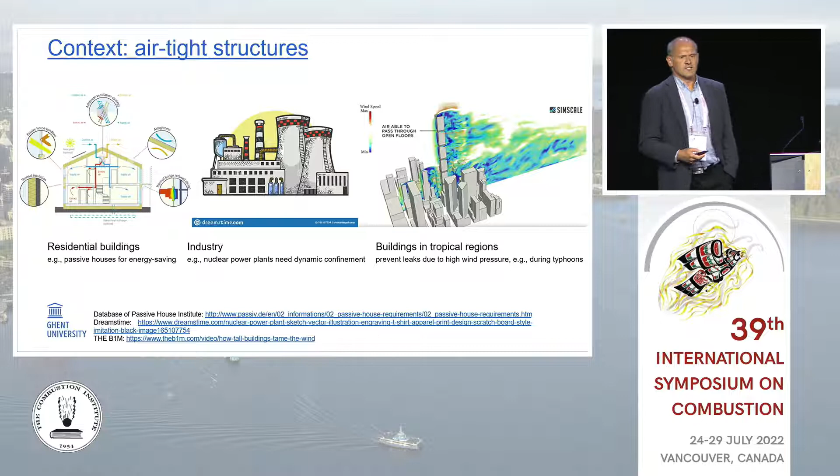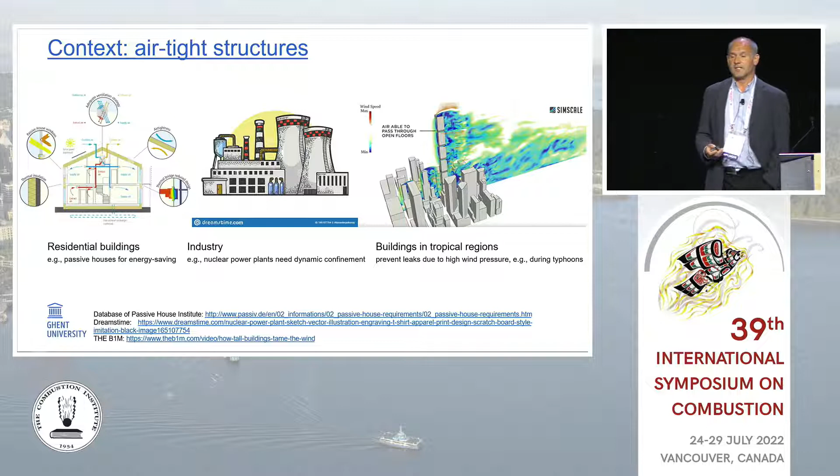The context for our interest in these airtight enclosures is the modern trend in buildings toward reduction of energy consumption. Houses are better insulated and made more airtight. There are also applications in industry, for example the nuclear industry, where you have to avoid spreading of radioactive material in case of an incident. Also, windy regions with high-rise buildings tend to be airtight.

This can be problematic in a fire, because hot combustion products are released, and these have the tendency to occupy more volume than gases at ambient temperature. In combination with a low leakage area, this leads to substantial rises in pressure, which in turn can hinder evacuation of people from a building, because it becomes very difficult to open doors.

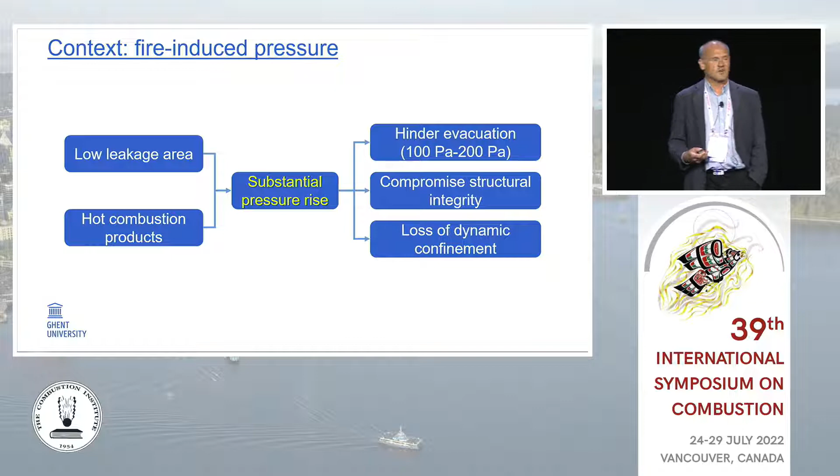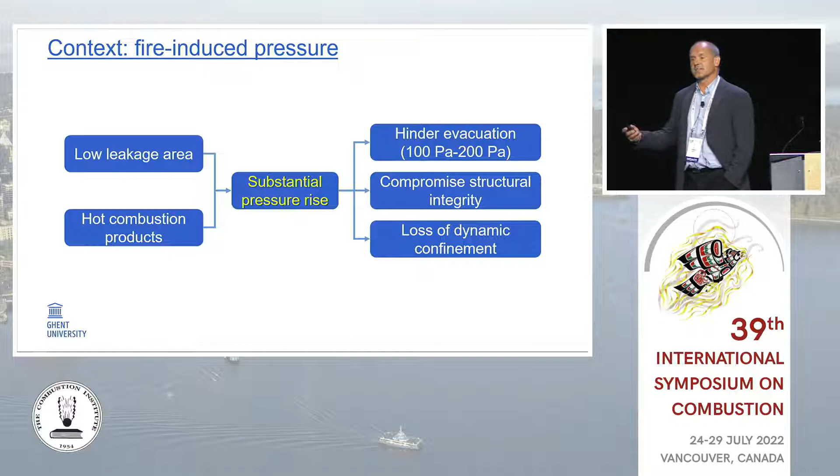If you have a pressure higher than 200 Pascal, even the best trained person in this audience would not be able to open a door. But it can also compromise structural integrity and lead to a loss of confinement, in a dynamic way due to the fire dynamics, and thus this safety issue can be a real problem.

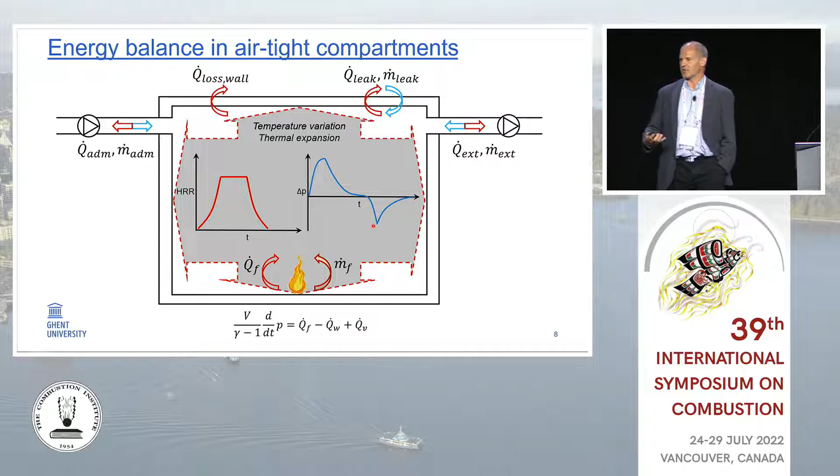So in principle, this is a bit strange at first sight, but it's not, and we tried to explain that because these flow rates that you see here, admitting and extracting gases, they would also depend on the pressure inside the enclosure through the characteristics of the fans.

So one way to look at this issue is to say, well, this is an overall equation for pressure as function of time, so we don't really need much detailed information on the flow field to get this pressure evolution. All we need is an estimate of the heat release rate, the heat losses, and that's it.

So you can indeed go for analytical solutions and zone model type approaches, where you would have a single zone or maybe two zones inside the compartment, but not more than that.

I should say that the heat losses are not so easy to quantify, and they are important to quantify, but that's not the focus of the present talk. And there will be this complex dynamic interaction with the mechanical ventilation system.

Now, if you want to be really predictive, including a prediction of the heat release rate, then it will be important to have more detail on the flow field, because you need to know what's happening in the region where the fuel is released.

Again, small disclaimer here, these slides are changing automatically apparently. It's very important, if you have a liquid fuel or a solid fuel, to model the evaporation of the liquid fuel or the pyrolysis of the solid fuel. These are very interesting and important topics on themselves, but I'm not going to address those.

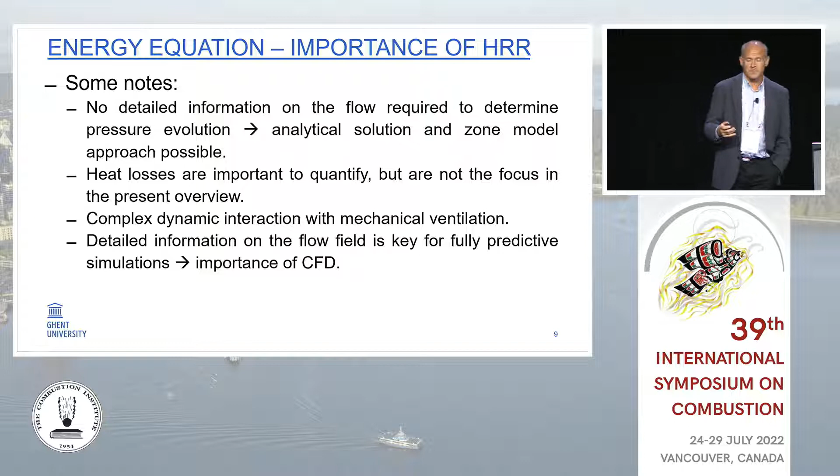So I'm only going to focus on gas phase phenomena, and I'm going to use results that we obtained with gaseous fuel. And even that is complex enough, as I will try to explain.

So when I say 'we', I actually do not mean only at Ghent University. We had a very good collaboration with IRSN in France, where former PhD student Junyi Li spent a few months to do some experiments in what is called the NYX setup.

The details you can find in the paper, but it's a rectangular box. You see the size here on the slide. And what is specific in this study is that he used gaseous propane fuel that you see there in the red square on the sketch.

And this was fully instrumented, with thermocouple trees, pressure measurements, even some measurements of species. So we had pretty good control over what was happening, because we could monitor and actually control the gaseous fuel flow rate into the compartment.

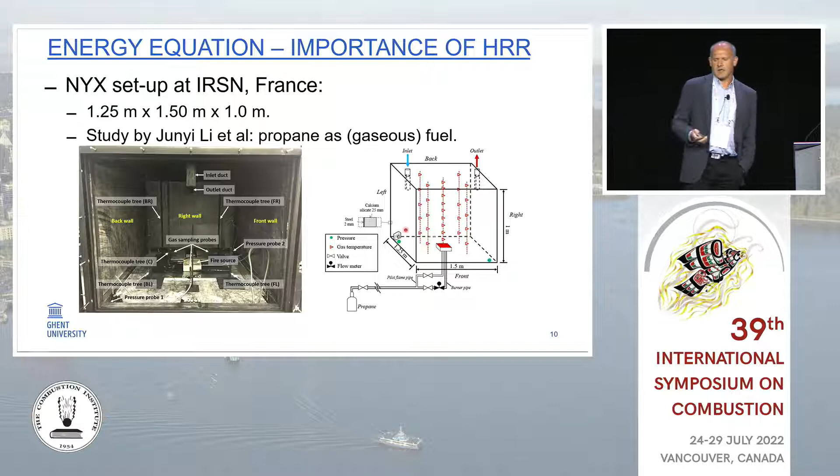The blue line is the supply duct for air, and the red arrow that you see there was the extraction of the hot gases. These give you some impression of some pictures during the tests.

These were provided by Dr. Hugues Prétrel from IRSN. So the top left is the ignition of the pilot flame, and then the second one is the real ignition of the gas fuel, and then you have some steady burning phase where we have a constant heat release rate as function of time, but obviously things are turbulent, so the flames are fluctuating, and at some point we chose to extinguish the flame in a controlled way.

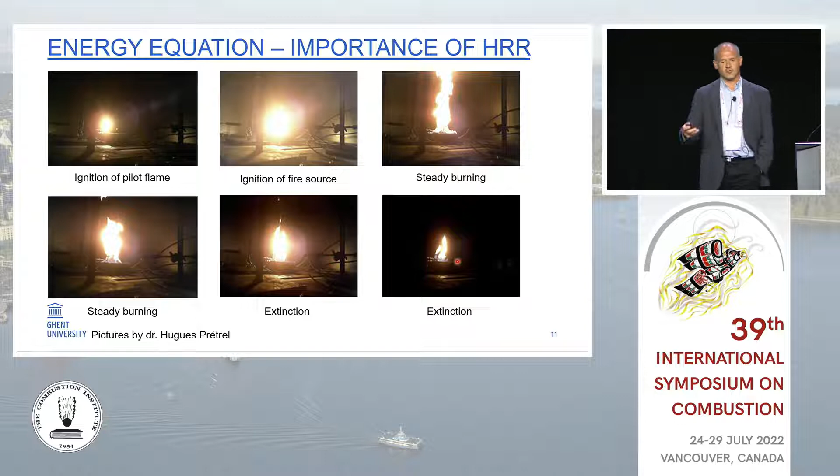And the idea was to vary certain parameters and to try to understand what is the resulting pressure evolution. So what you see here as one of these results is we start off with a zero fuel mass flow rate, and we switch on the ventilation system. So you start with some under pressure, which is typical in the context of nuclear industry, for example, so that you do not have gases escaping from the enclosure.

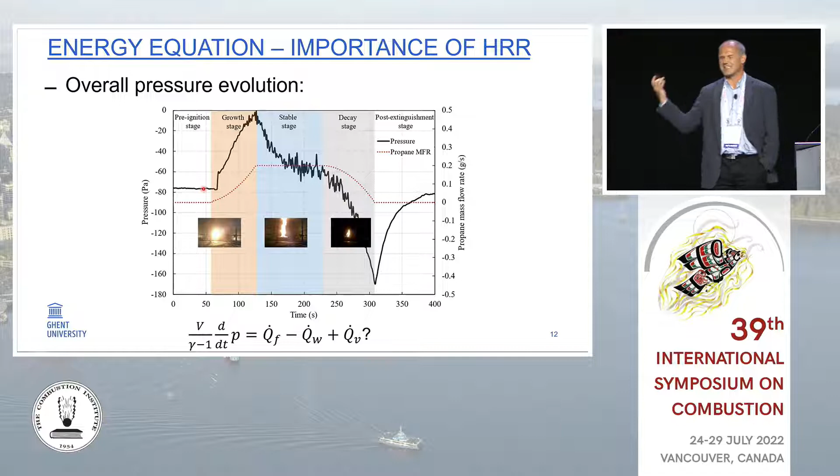Once we ignite the gases and start to feed the compartment with fuel, which is the red dotted line, you see a sudden increase in pressure as a function of time. As long as we keep increasing the heat release rate, the pressure keeps increasing over time. Then we keep the heat release rate at steady state, and you see this relaxation of pressure back to somewhere close to the initial value, until we choose to reduce the heat release rate as a function of time, and then we have a significant underpressure inside the enclosure.

If you allow the system to cool down and keep the ventilation system switched on, your pressure goes back to the initial value. But as I said, this cannot readily be explained from this equation, because you would expect a pressure rise as a function of time as long as the heat release rate is dominant.

Now, the interaction is much more complex, and I will not spend too much time on this, but you can look at it in terms of an electrical analogy, where the enclosure works as a capacitance in the circuit, and then you have different sources. One would be the fire, the other two would be the ventilation fans, and you would have flow resistances through the duct systems, leading to a complex interaction.

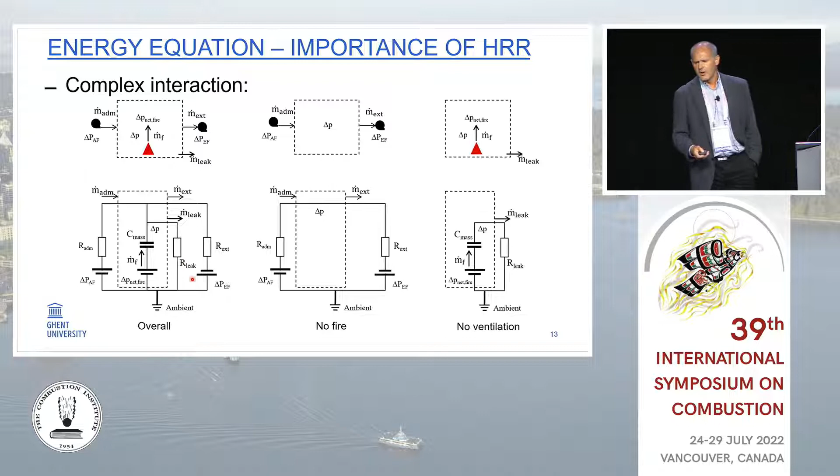You can study the whole thing, or you can study the ventilation only, or the fire only. In the end, if you do that and perform some time scale analysis, you do indeed find this theoretical result: in certain circumstances, it's the pressure rise rather than the pressure derivative as a function of time that evolves directly with the difference between the heat release rate and the losses through the walls.

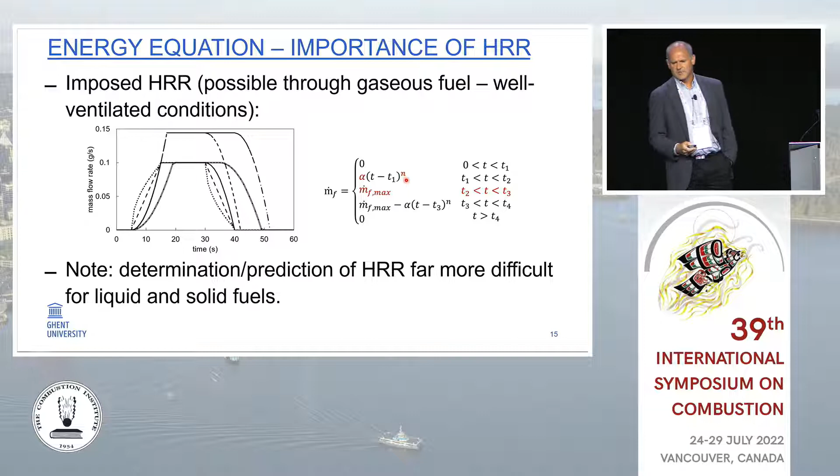This gives you an overview of what we varied. We varied the speed with which we increased the heat release rate, the duration, the maximum heat release rate - many parameters. So it was quite an extensive experimental campaign, which we could then use to check and validate our numerical results.

Now, before getting into the CFD part, a few words on scaling. In fires, the scaling laws are actually well known. What is done is so-called Froude scaling, where you keep the Froude number constant. If you do that, you find that the heat release rate has to scale with the length scale to the power 2.5. Nothing very special there.

But it becomes much less straightforward when you combine it with mechanical ventilation, because then different factors come in. You also want to keep an eye on the global equivalence ratio, because if you start changing flow rates, you can start changing the regime between well-ventilated and under-ventilated conditions. We are also looking at transient phenomena, so we have to keep an eye on time, which scales with the square root of the length scale.

On top of that, the heat losses are important, and these are not so easy to scale because the material behaves as thermally thick. So if you use the same material, the relative contribution of heat losses changes at full scale versus small scale.

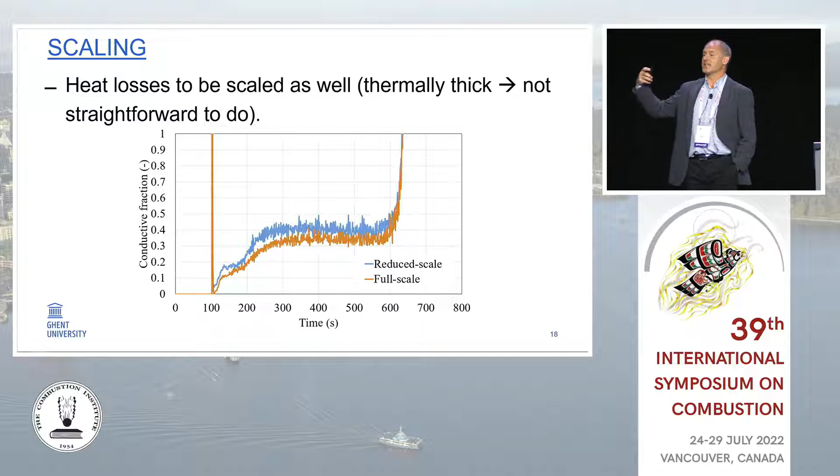What you see here in this plot is the relative contribution of heat losses by conduction into the wall at reduced scale, which is the blue curve, compared to full scale, which is the red curve. As you can see, relatively speaking, you have more heat losses at reduced scale, so for a well-scaled heat release rate as a function of time, you would expect a lower pressure rise, because the heat losses were a sink term in this pressure equation.

This is indeed confirmed here, giving you some flavor of what you could do with CFD more easily than in experiments. What you see here are three lines. The bottom line, in blue, shows results at reduced scale - pressure evolution as a function of time. This is the lowest value because the heat release rate is scaled with length scale to the power 2.5, so if you reduce the heat release rate, you have a reduced pressure rise. The dotted curve that you see here is not experimental data.

It's just the blue line multiplied by a factor of 4. Why by a factor of 4? That's because we found, through the scaling laws, how pressure should scale. So that's what you would expect from just scaling experimental results from small scale to full scale.

Now these give an underestimation of the pressure rise. You see the red curve are CFD results directly at full scale. So indeed, as expected from the previous slide, as you have relatively speaking less heat losses at full scale, you go to higher pressure rises at full scale.

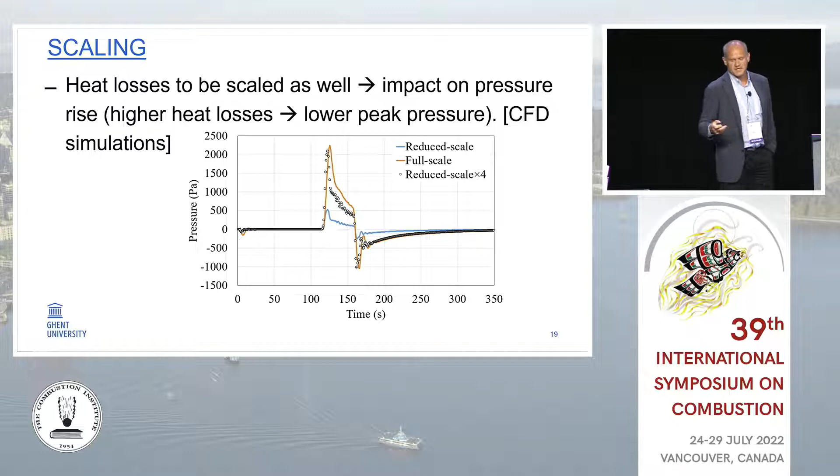So this is just a warning in terms of experiments. If you go to reduced scale for these types of experiments, you have to be a bit careful when scaling them. This is in terms of the maximum pressure, but there's also an issue with the transient phenomena. As I said before, time scales with the square root of the length scale, but as these are pretty fast pressure changes as a function of time, it becomes less straightforward to do the proper scaling.

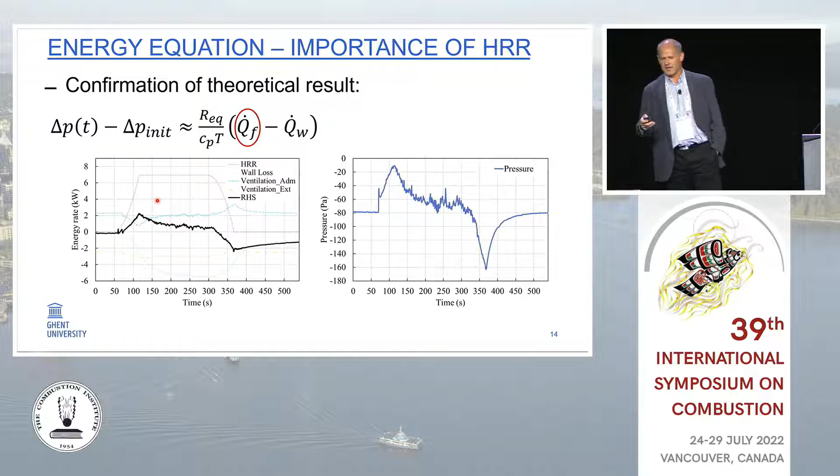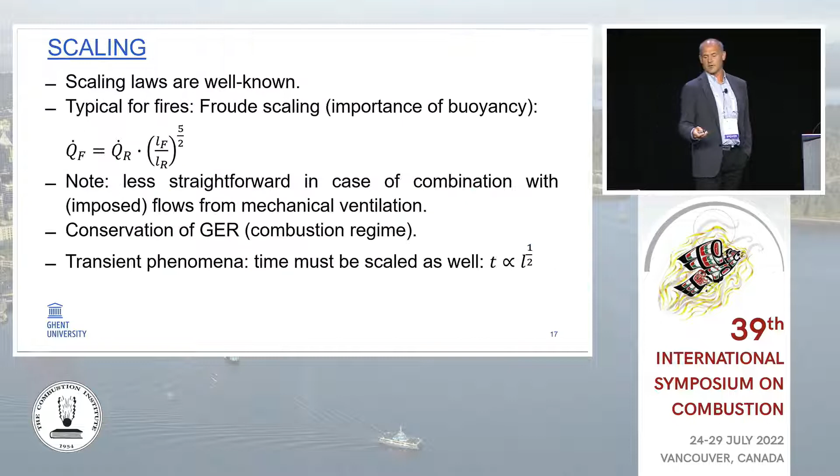I have to go back a few slides now, apologies for that, but this theoretical result, if you look carefully, it's not exactly equal to, it's approximately equal to. And if you do the analysis on the original energy equation, which you see here, you see that some of these terms scale differently with length scale if you look at it as a function of time. That's something we also illustrated here.

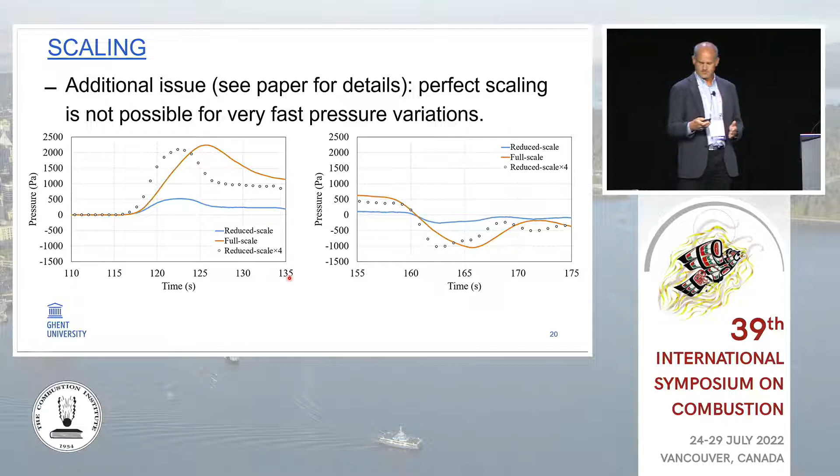So what you see here again is not experimental results, but just differences between CFD simulations. You see that the transient at full scale is different from the one at reduced scale. Again, something I think worth exploring a bit more in the future, but that's an opinion.

So let's have a look at CFD simulations. I think if you want to see the state of the art of CFD modeling today in the fire safety science community, it's probably a good idea to check the website of the MACFP workshop series. MACFP, for those less familiar, is Measurements and Computations of Fire Phenomena. It's a very nice GitHub-based website where you find a lot of simulation results, experimental data, and you get a feeling, a flavor of what's happening today in the CFD simulations of fire.

And the common approach used for turbulence is the large eddy simulation approach. DNS is not affordable, and unsteadiness is too important for RANS to be popular in the community of fire safety science. So turbulence is addressed with large eddy simulations.

Now, at Ghent University, we believe that the dynamic approach to model subgrid scale quantities has some potential. You can do that for the turbulence, you can do that for the combustion, you can even, to some extent, do that for length scale determination in radiation models. So we believe this is worthwhile investigating. We'll see if this is true or not, but so far, Georgios Maragkos has done quite a number of simulations with reasonable success.

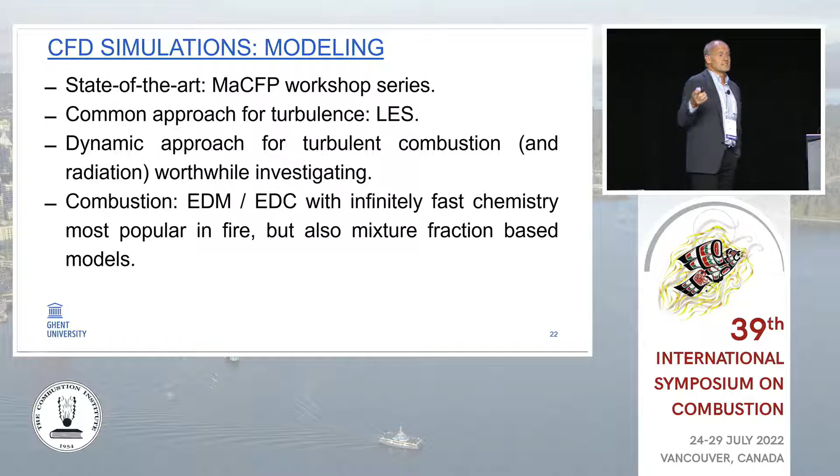Now, combustion, here at the Combustion Symposium, this may seem quite old-fashioned, but the eddy dissipation model, or eddy dissipation concept, with infinitely fast chemistry is actually the most popular tool today. And that is because the length scales and the time scales in fires are significantly different from the ones that you would have in flames that we see here most often at the symposium. So this is the most common approach, but mixture fraction-based models are used as well.

Again, I just remind you of the fact that I'm not talking about evaporation, I'm not talking about pyrolysis. These are key aspects in most fire simulations, but I don't have the time to talk about that here. So I just want to give you a little bit of a feeling of what are key elements, key differences between, on the one hand, EDM, EDC, and on the other hand, mixture fraction-based models.

Now, the EDM, EDC models are applied directly on a CFD mesh. And this gives you a very strong advantage in that the heat release rate, which is typically calculated as the product of the reaction rate and the heat of combustion of the fuel, is directly present as a source term in the CFD equations at the CFD mesh. So that means that if you know how much fuel you are injecting into the domain, and if the combustion is complete, then you automatically get the correct total heat release rate.

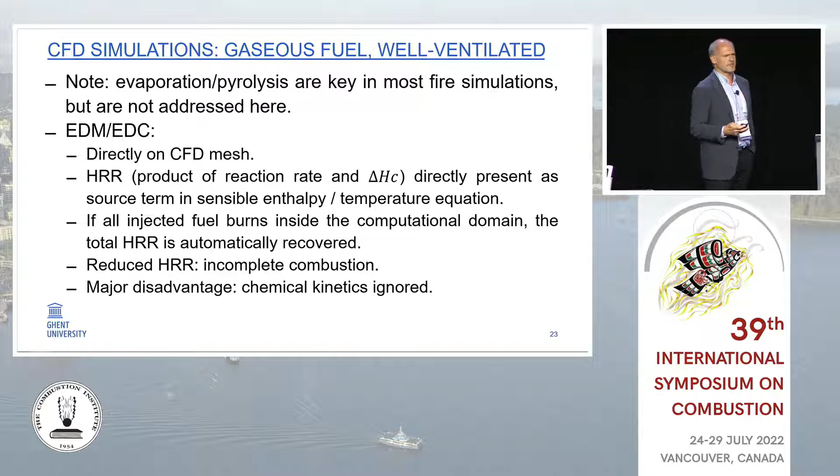And that's very useful, because if you have a reduced heat release rate, you can use that as a measure to quantify the completeness of the combustion inside the compartment, be it airtight or not - this is just a general statement. But an obvious major disadvantage is that the chemical kinetics are ignored. So in that sense, you may want to look at mixture fraction-based models, where you can have much more information in terms of chemistry and temperatures at a relatively low price.

What we discovered as a major disadvantage for these models in the context of fires is that the heat release rate is now primarily determined in mixture fraction space, and you somehow have to bring that information back onto the CFD mesh. That's less straightforward than we thought it would have been.

What is specific about fire in contrast to jet flames is that we have a very low scalar dissipation rate, or conditional scalar dissipation rate, because everything is driven by buoyancy, with very low velocities on the order of a few meters per second. This leads to very slow mixing rates of fuel and oxidizer compared to jet flames, leading to long response times of flames.

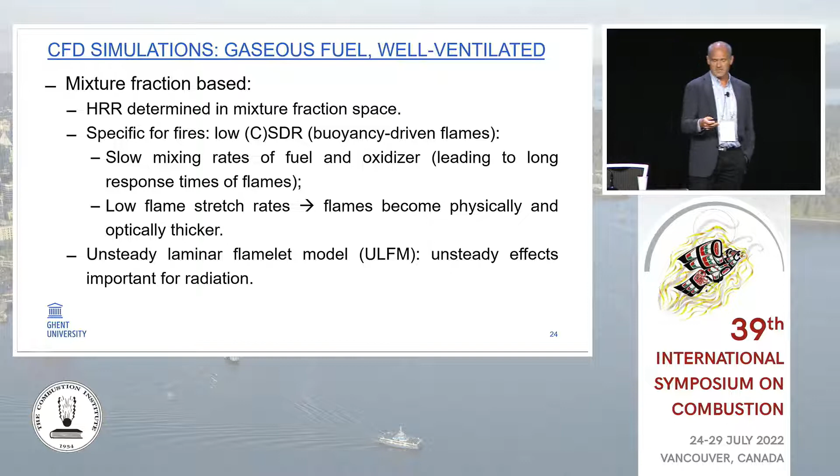It also leads to low stretch rates in the flames, so the flames become physically thicker and also optically thicker, which has issues in the context of radiation, always a very important mechanism of heat transfer in fire. In the framework of the unsteady laminar flamelet approach, these unsteady effects have been mentioned to be important for radiation by Heinz Pitsch almost 20 years ago.

When I said that it's not so straightforward to find the correct heat release rate on the CFD mesh, we first thought we did something wrong at Ghent University, until recently we saw some work at the University of Poitiers in collaboration with Arnaud Trouvé in Maryland, where they report that in the context of laminar flamelet modeling, it's not straightforward to recover the heat release rate.

They suggest an approach that I think is very interesting to explore: not to look at the local scalar dissipation rate, but to also take into account some history effects. These history effects are important because of the slow response times of the flames to these stretching rates. I think this is something worthwhile exploring.

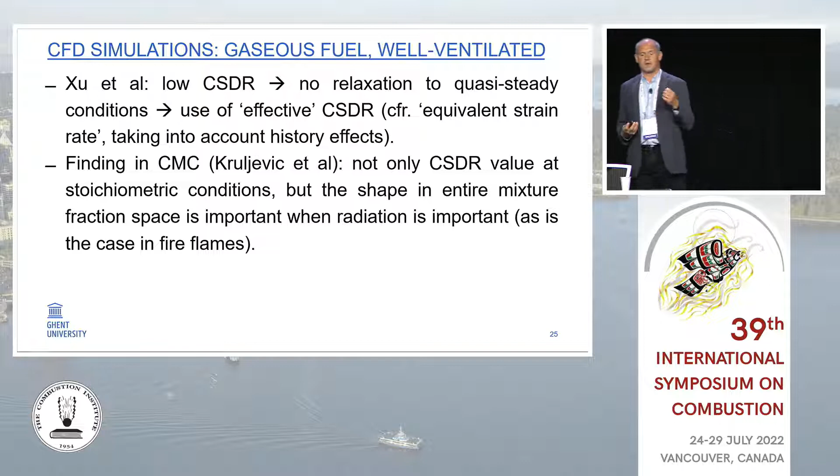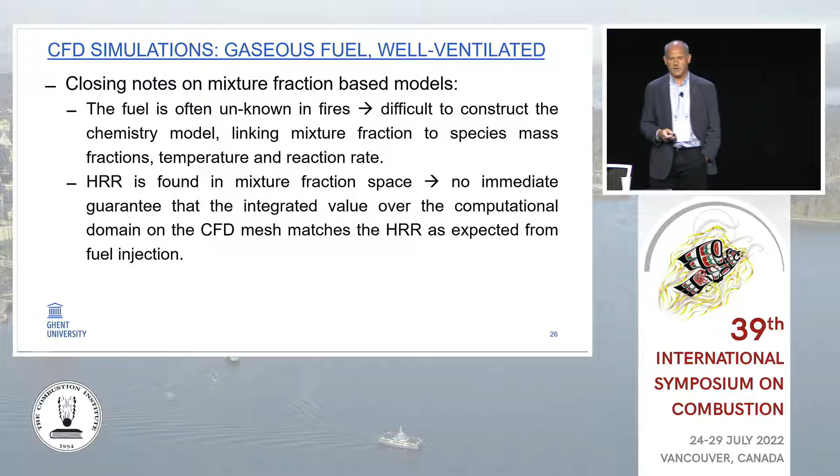Also in the context of CMC, we found that it's not straightforward to find a good value for the scalar dissipation rate. On top of that, that's work by Boris Kruljevic. He also figured out that when radiation is important, and it's almost always important in fire flames, it's not good enough to have high accuracy around stoichiometry. You really need good accuracy over the entire mixture fraction space range. So these are a few closing notes on mixture fraction-based combustion models.

Now I would like to say a few words about extinction and reignition, because that's also very important in the context of compartment fire dynamics. If you use the EDM-EDC approach with infinitely fast chemistry, there is no way to do this from a chemical point of view.

So you need to find another way around this, and then it's interesting to check what kind of extinction phenomena you can expect. Again, there is a fundamental difference between extinction at high strain rates, at high scalar dissipation rates, in jet flames, and extinction phenomena in fire flames, because strain rates are low and scalar dissipation rates are low. So this aerodynamic quenching, very common in high velocity flames, is not found in fires.

Rather, the main quenching mechanism in fire flames is actually a thermal mechanism, where heat losses from the flames by radiation, for example, become so large that the temperature becomes too low for the chemistry to continue, and that's how you can get to quenching.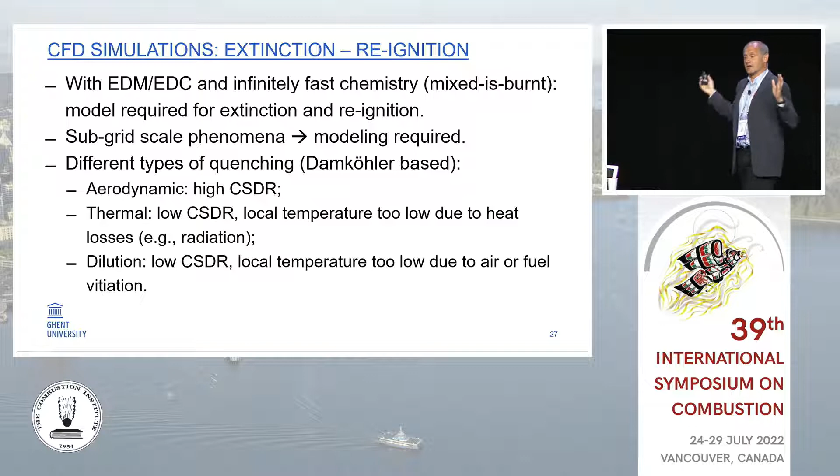Another way of quenching is through dilution. If you have mixing of oxygen with combustion products, then maybe there is too little oxygen left to have a significant rise in enthalpy, a significant rise in temperature, and again the combustion stops. All of this can be approached through the Damkohler number. That would be the unifying approach.

But nevertheless, in engineering type calculations, it's a bit easier to work directly with the temperatures found in CFD cells. This is the approach followed in the FDS code today, where you work with a so-called critical flame temperature, and you check whether the conditions inside a CFD cell are such that it's possible to raise the temperature upon complete combustion beyond a certain critical flame temperature. So this ignores the possibility of vitiation to some extent, and certainly of aerodynamic quenching, but it works pretty well.

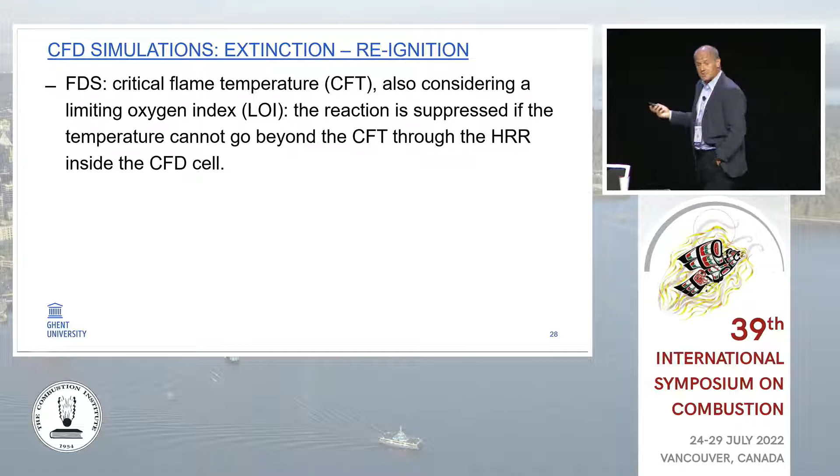Actually, I should be a bit careful here. Vitiation is taken into account to some extent, because the oxygen concentration is also taken into account. There are other approaches.

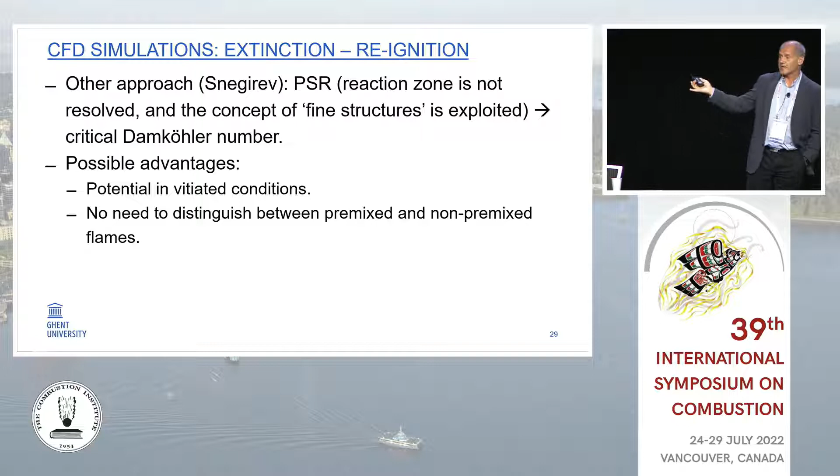Professor Snegirev introduced the idea of working with a perfectly stirred reactor at subgrid scale level, using the fine structures concept. From that perspective, he also arrives at a critical Damköhler number, with the possible advantage that you can automatically work with vitiated conditions, and there is no need to distinguish between premixed or non-premixed flames.

Now, extinction is one thing. Spurious reignition, unrealistic ignition where temperatures would be too low to really have ignition but where the modeling forces ignition, is sometimes an even more important issue, because that could give you flames in CFD simulations that are completely unrealistic, where they would not be in reality. Here too, you could follow an engineering approach and say that you can only have ignition beyond a certain critical temperature. That's one approach.

A very interesting, I think, recent theoretical framework was introduced by Dr. Sergei Dorofeev. If you want more details, feel free to talk to Sergei, where he worked with the concept of mixed eddies, which gives a unifying approach for extinction and reignition.

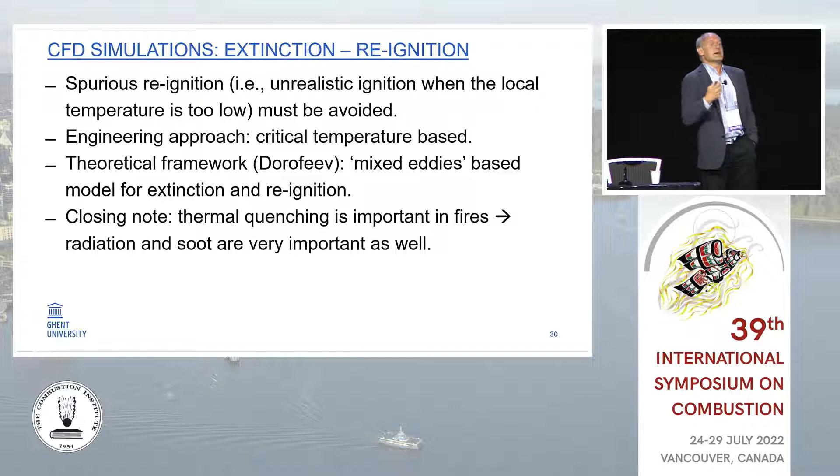So as a closing note here, thermal quenching is very important in fire. That is due mainly to radiation, which obviously implies that radiation modeling and soot modeling are very important in the context of fire, and there is still a lot of work to be done there.

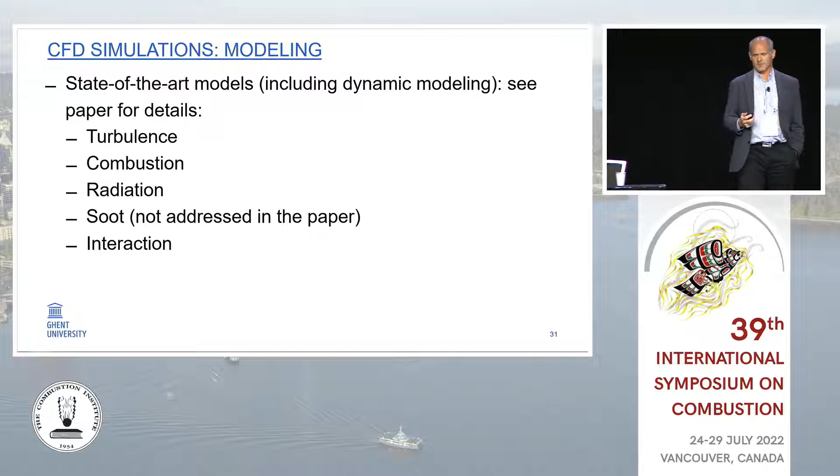Okay, that's what I wanted to say about the modeling. You can look at the paper for more details.

They also saw that these low frequency oscillations only occurred when the temperature inside the compartment was sufficiently high and the oxygen concentration was sufficiently low, not too far from the extinction limit. So the assumption is that this should be linked to the global equivalence ratio.

One idea is that if you have this combined dynamics between fire dynamics and oxygen supply, in some conditions, if you have a strong fire, you'd have less oxygen supply due to pressure rise inside. The fire becomes weaker, so then you get more oxygen supply through this dynamic coupling, and the fire becomes stronger again. This could then be linked to displacement of flames away from the liquid fuel.

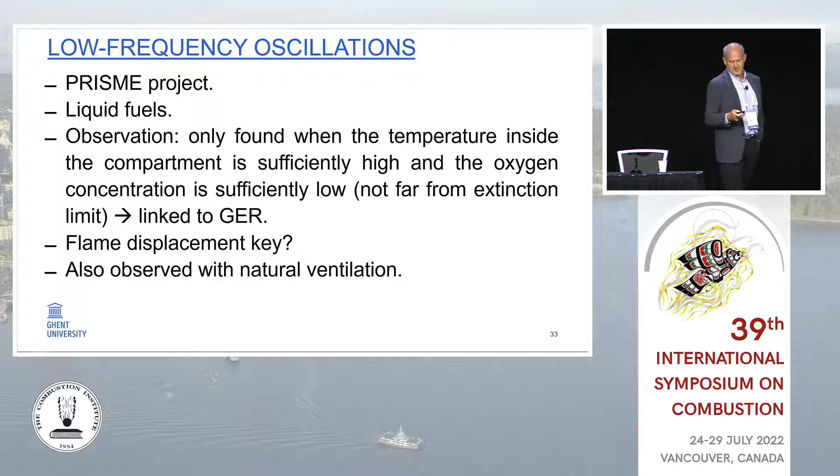So the common thinking is that this was directly linked to the evaporation of the liquid fuel in the compartment. I'm mentioning this in the context of the PRISME project, but these low-frequency oscillations have also been observed a long time ago in Japan and in the US with natural ventilation, so it's not linked per se to the mechanical ventilation aspect.

So we wanted to challenge these hypotheses, and in these next studies where we now have gaseous fuel, we wanted to see if we can also have these low-frequency oscillations, because if we do, it's not only linked to evaporation of liquid fuel, since we don't need to vaporize the fuel anymore.

On top of that, we also see in the literature increased evidence that this global equivalence ratio, while obviously important to characterize the combustion regime, is definitely not sufficient to characterize everything, because results have been reported showing a big difference depending on the position of the inflow of air. If you supply air close to the burner, it's completely different from supplying air close to the ceiling, even with the same global equivalence ratio.

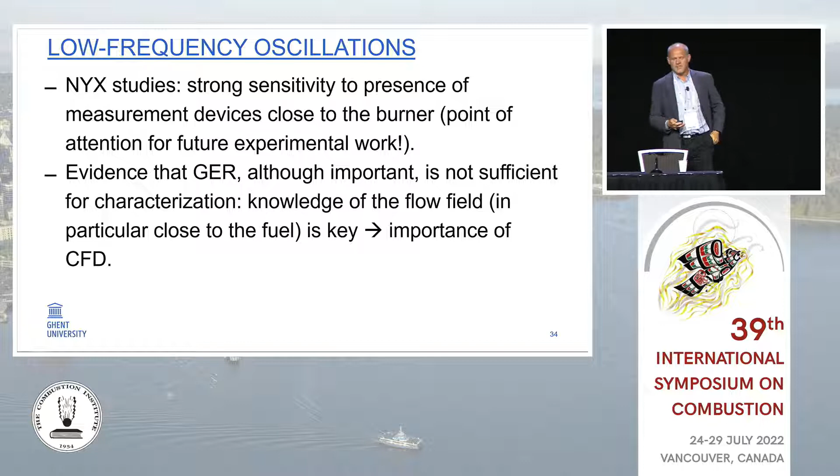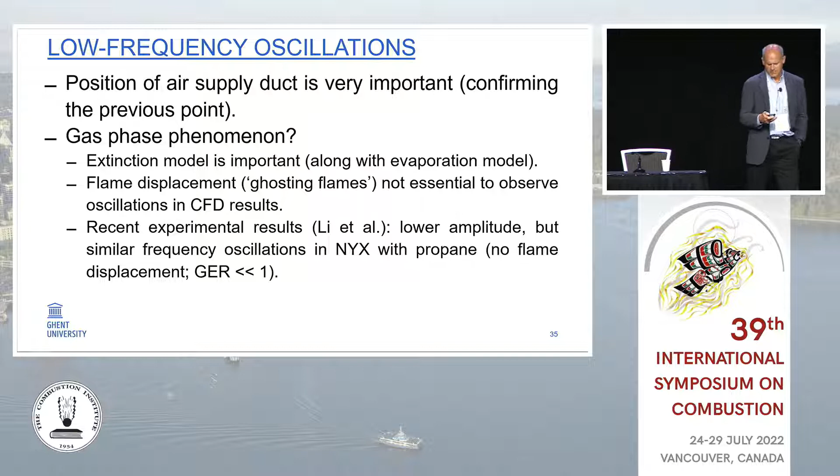So that shows it's important to have knowledge of the details of the flow field, which brings up the importance of CFD. For the sake of time, I'm going a bit quicker.

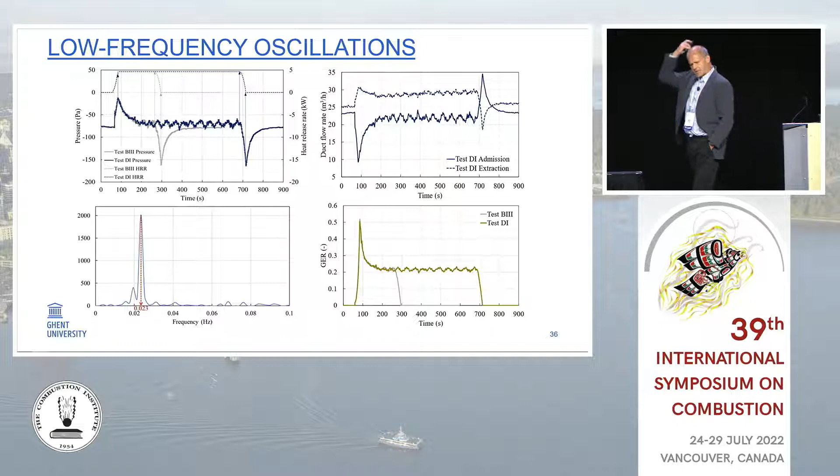I'll go straight to this result, again by Joigny, where you can clearly see in the top left figure the heat release rate that was imposed, that the pressure rises as it commonly does, and then you start to see these low frequency oscillations. This illustrates that it's not only linked to evaporation of liquid fuel, since we also see it in gas fuel. The fast Fourier transform analysis shows a very distinct peak, so it's very easy to characterize.

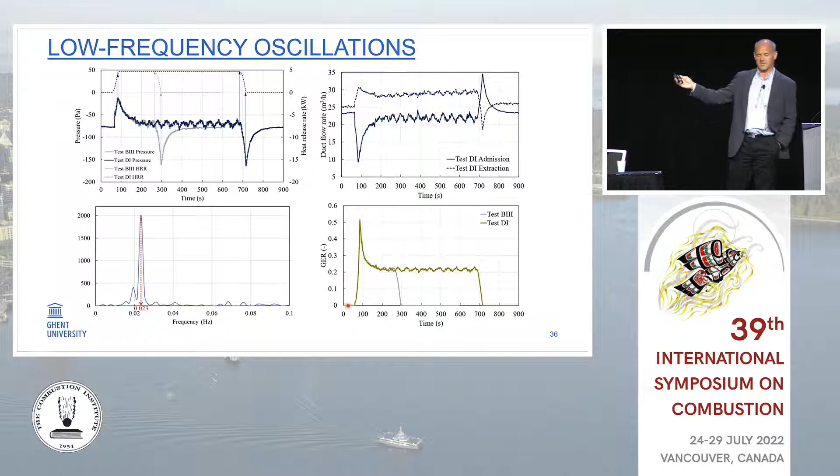Interestingly, it's the same frequency as tests done by Maxime Mense in Marseille before with liquid fuel - the frequency is the same even though the fuel was completely different. The other graphs show the supply flow rates and the global equivalence ratio, which does not go beyond 0.5. So this is far away from 1, far away from underventilated conditions.

So this brings me to the argument that there is a very strong need—that's an opinion—to look more into detailed interaction between flows and flames. This is a significant difference from a well-controlled jet flame, where you have well-controlled flow fields, versus a flow field with a fire, where the fire itself changes the flow field.

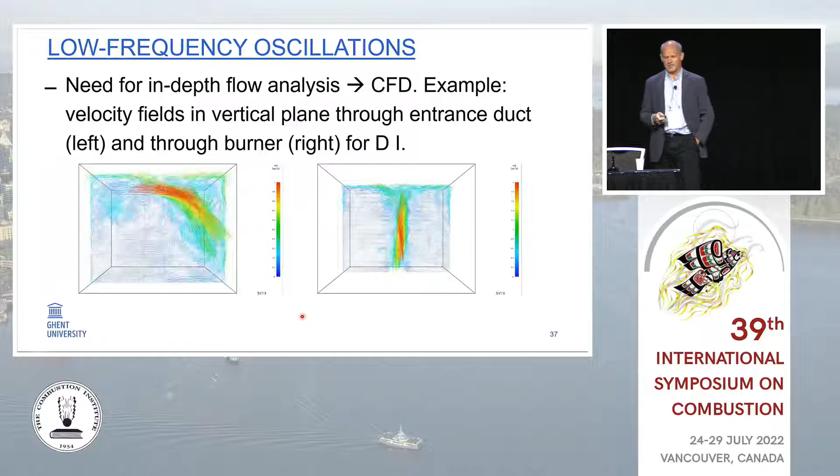So you have very complex interaction between flows coming horizontally, coming vertically in the flames, stretching them, moving them around, and all of this at low scalar dissipation rates. So I would argue that it's very important to focus more strongly on this interaction between flow field phenomena and combustion phenomena in the context of fire.

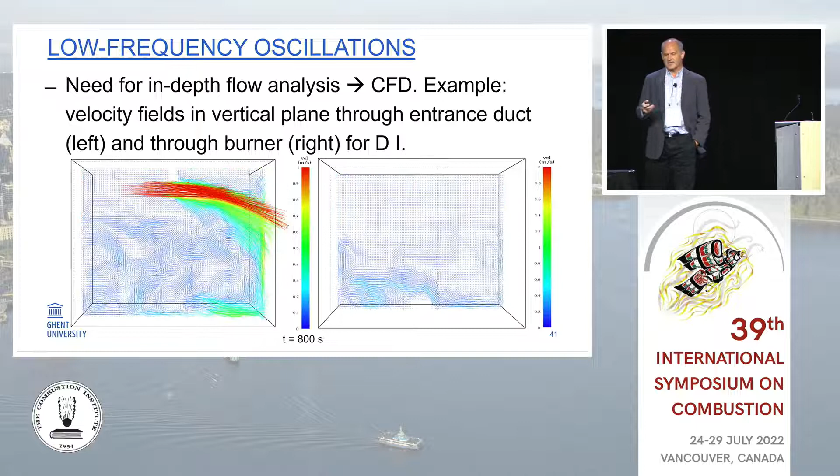So this brings me to the conclusions and some outlooks. The context was airtight enclosures where you have a fire-induced pressure rise. Going into the energy equation, I tried to explain that it's important to know the heat release rate and the heat losses per unit time.

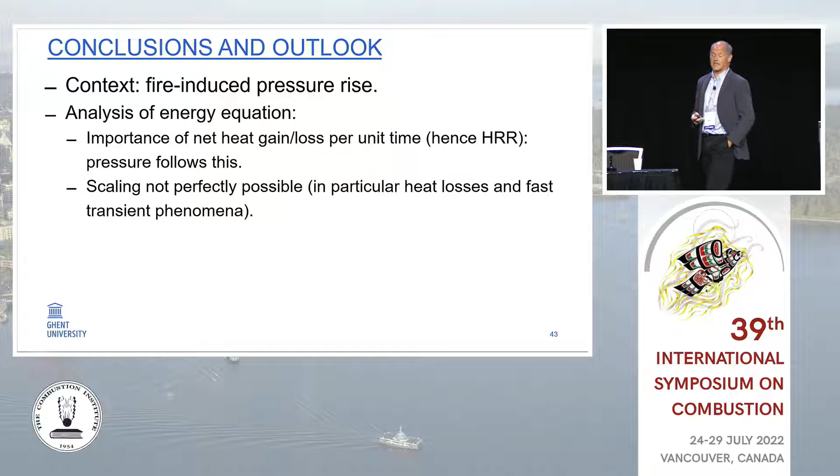That scaling is never going to be perfectly possible, and particularly the heat losses and fast transient phenomena are hard to capture. In the context of turbulent combustion modeling, I tried to say a few words on the importance of extinction and reignition. I believe—that's an opinion—that mixture fraction-based models are still worth exploring, but we have to look into this low conditional scalar dissipation rate phenomenon and how to get the correctly integrated heat release rate in the CFD mesh. Thermal quenching is key, so radiation and soot are very important.

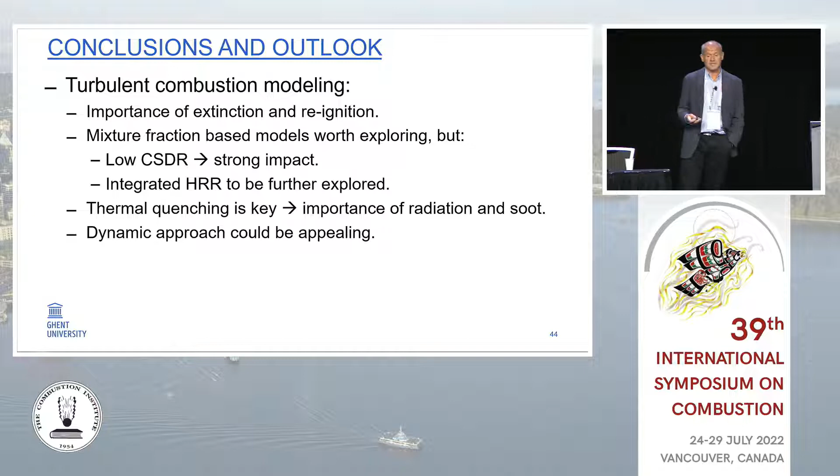At Ghent University we believe that the dynamic approach might be appealing. And then finally, these low frequency oscillations—the global equivalence ratio is important, but not enough to characterize what's going on. It has been observed now also with gaseous fuel, and the detailed knowledge of the flow field is key.

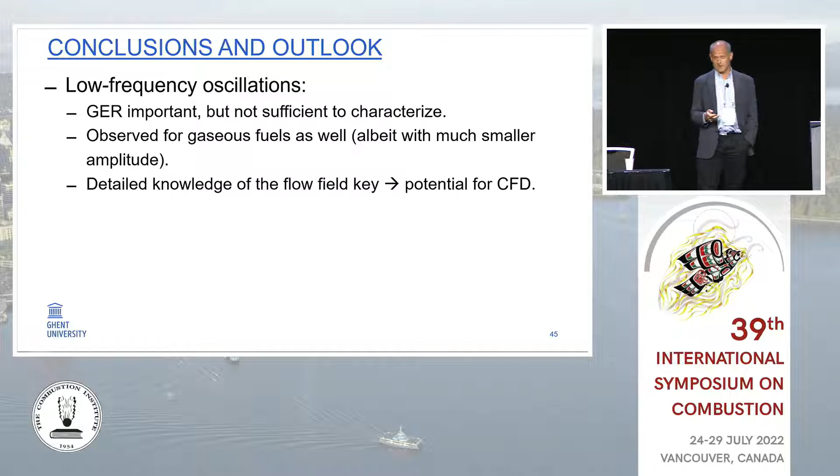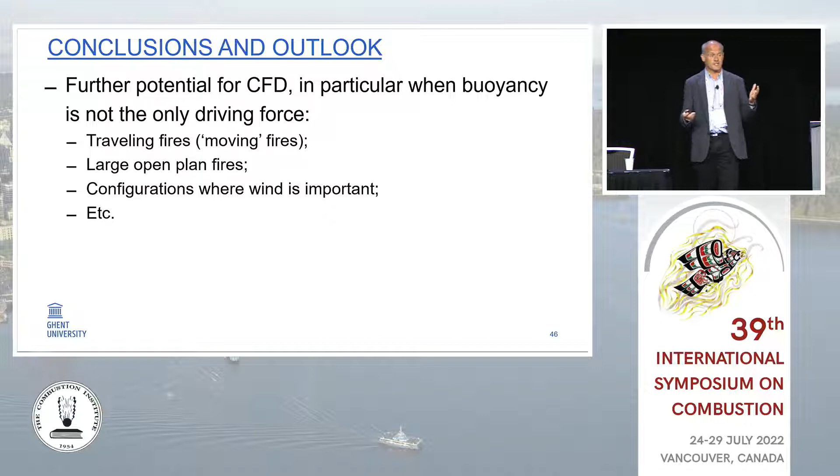So there is a lot of potential for CFD, I think, also outside of what I said here. If you look at traveling fires—which I prefer to call moving fires—large open plan fires, configurations where wind is important, all of these things, I think CFD has a lot of potential to try and build some more insight.